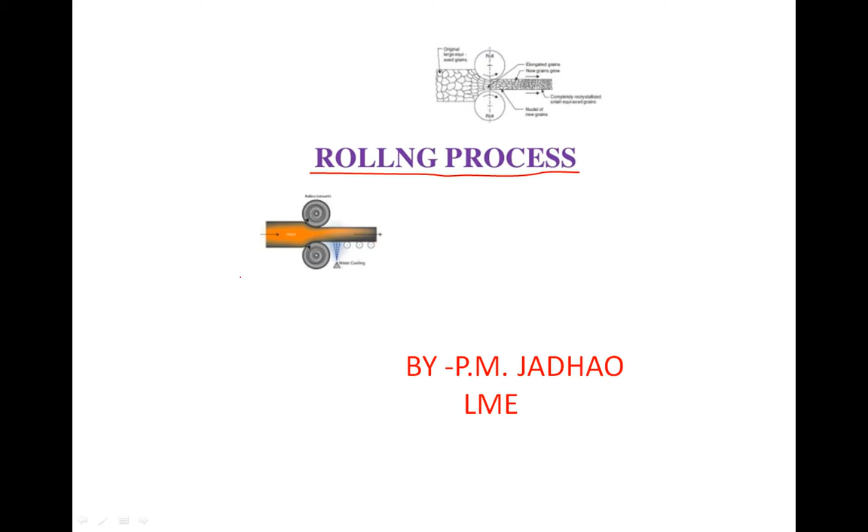So this rolling process, if you look at this diagram, there are two rollers. This is roller number 1 and this is roller number 2. R2 is roller number 2 and this is the workpiece or billet. You are calling it a billet or workpiece. This is the billet. This billet is fed in between these two rollers.

When it passes, the compressive force of the roller and the friction between this billet and this roller will plastically deform and reduce its cross-sectional area because of the compressive force and the friction between this roller and billet. So this is the working principle of rolling process.

So what is the working principle of rolling process? When you are passing this billet in between these two rollers, it gets compressed, and because of the compressive force and friction between this billet and roller, you can convert this billet into various shapes. That is the basic principle of rolling process.

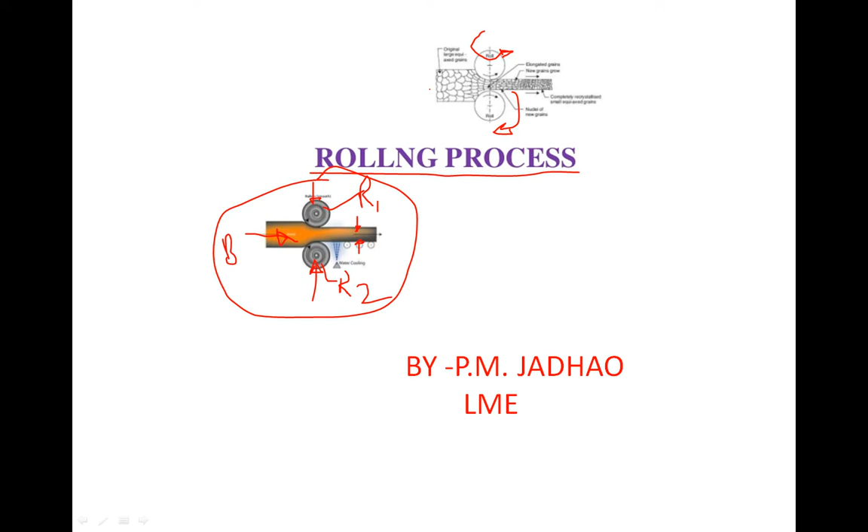In this, these two rollers will rotate in opposite directions. If you look, this is rotating in the clockwise direction, so the above roller will rotate in the anti-clockwise direction. Then this billet will pass through, and there is a reduction in cross-sectional area, or reduction in width of this billet.

If you see this, then this is the reduction. So this is L2 and suppose the distance is L1. So if the width at the beginning is L1, at the last you are getting L2, and there is a large reduction in the width of the billet or workpiece. So that is the rolling process.

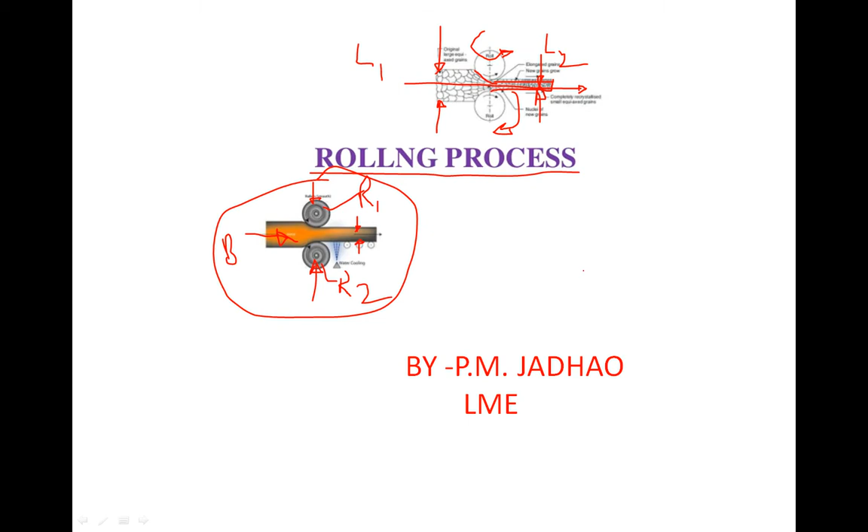So this is the basic definition of rolling, and rolling is widely used as a forming process because there is no wastage of material. You are not wasting any material. That's why it is a forming process which provides high production and close control of the final product.

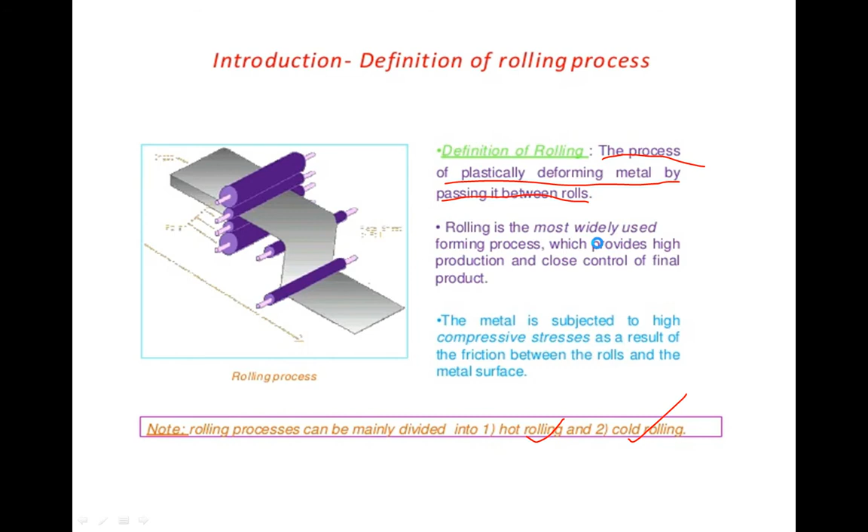The metal is subjected to high compressive forces as a result of the friction between the rolls and the workpiece surface. So there are basically two types of rolling. One is hot rolling, another is cold rolling. These are the basic terms used in rolling process: bloom, billet, slab, plate, sheet, strips.

So what do you mean by bloom? Bloom is the product of the first breakdown of the ingot. Its cross-sectional area is greater than 230 square centimeters. That is called a bloom.

Then this billet is the product obtained from the further reduction of this bloom into billet. And this billet is further rolled, and if the area is greater than 100 centimeters square with a width greater than or equal to 2 multiplied by thickness, then that is called a slab. This is the slab. Then if we carry out further rolling, the slab is converted into plate, sheet and strips like that.

So what do you mean by plate? Plate is the product with a thickness greater than 6 millimeter. Then that is called a plate. If the thickness is less than 6 millimeter and width is greater than 600 millimeter, then that is called a sheet. And thickness less than 6 millimeter and width less than 600 millimeter, that is called a strip. So these are the basic terminology used in rolling process.

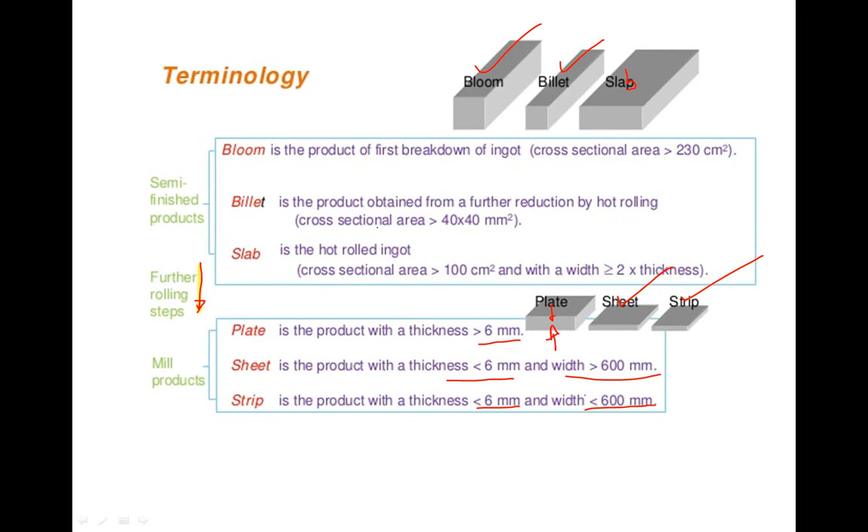Now there are two rolling processes. One is hot rolling process. Another is cold rolling process. When you are carrying out above the recrystallization temperature, then that is called a hot rolling process. If the process is carried out below the recrystallization temperature, then that is called a cold rolling process.

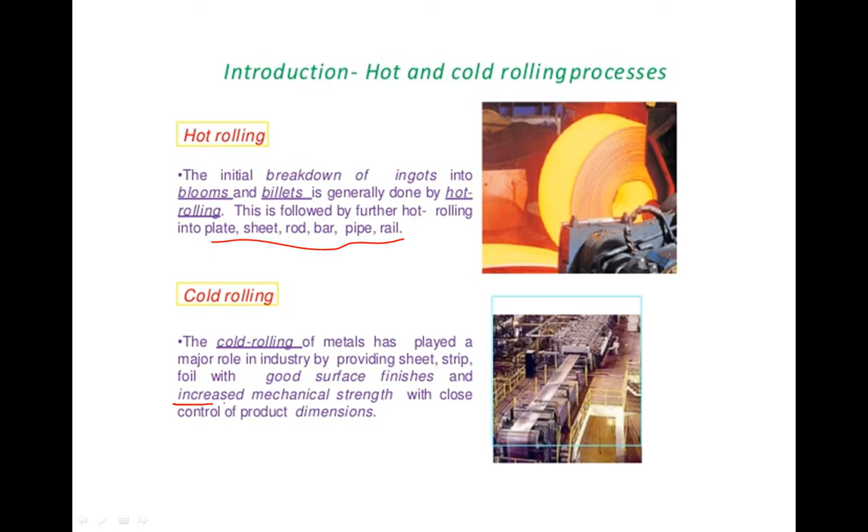So the initial breakdown of ingots into blooms and billets is generally done by hot rolling. This is followed by further rolling, that is, these billets are converted into plates, sheet, rod, bar, pipe and rails. Cold rolling of metal has played a major role in industry by providing sheet, strips, foil with good surface finishes and increased mechanical strength with close control of product dimensions.

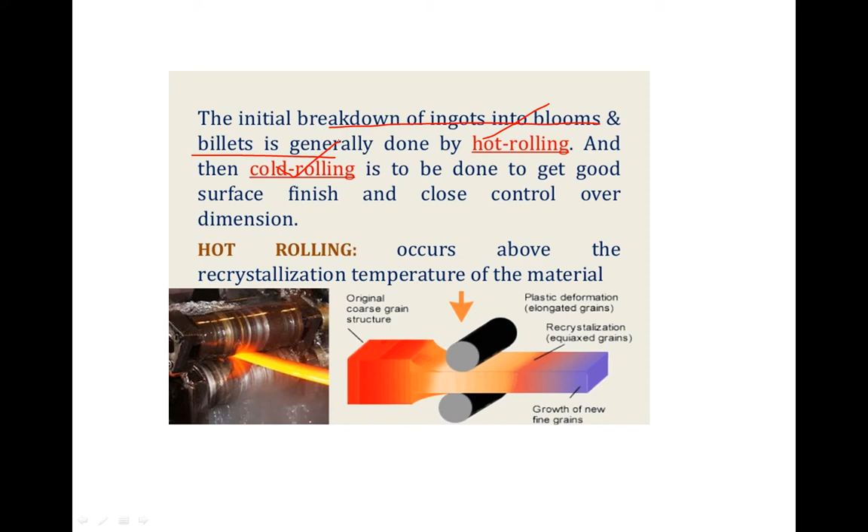So for breakdown of ingots into blooms and billets, the hot rolling process is used. When you require close control over dimension and good surface finish, then the cold rolling process is used. So hot rolling occurs above the recrystallization temperature.

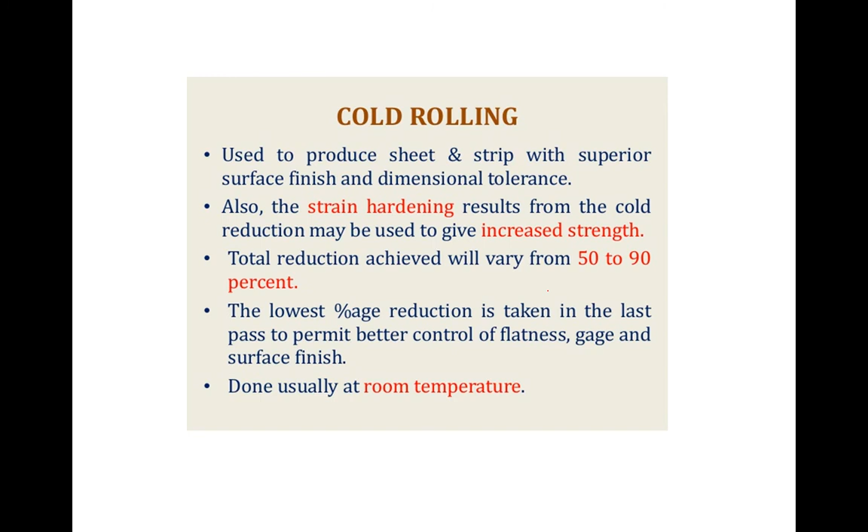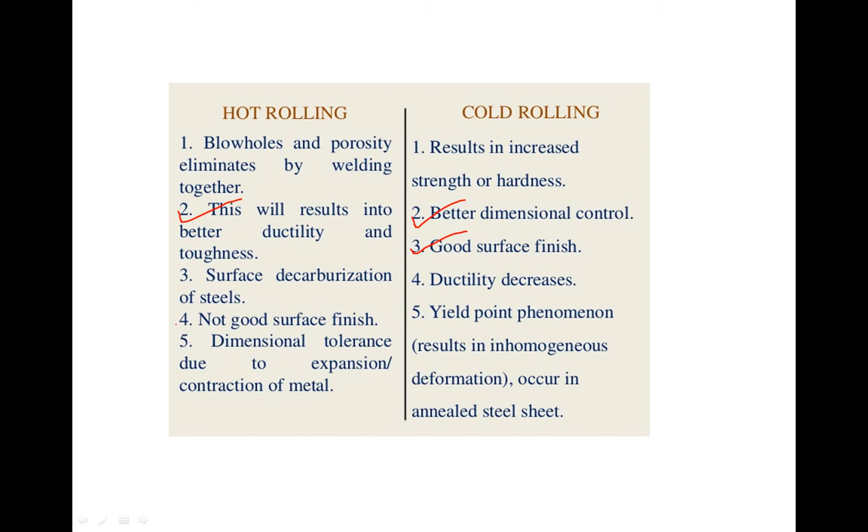So the difference between hot rolling and cold rolling. Blowholes and porosity are eliminated in hot rolling, but in cold rolling, there is porosity and blowholes. In hot rolling, better ductility and toughness you can obtain. In cold rolling, better dimensional control is there, and you obtain a good surface finish, but in hot rolling, you are not able to obtain a good surface finish. Some surface decarburization, rusting of the surface will be there.

In cold rolling, ductility decreases, not improved. So these are the various differences. In hot rolling, less force is required. In cold rolling, more force is required. So more powerful equipment is required in cold rolling, and less powerful equipment in hot rolling, similar to hot working of metals and cold working of metals.

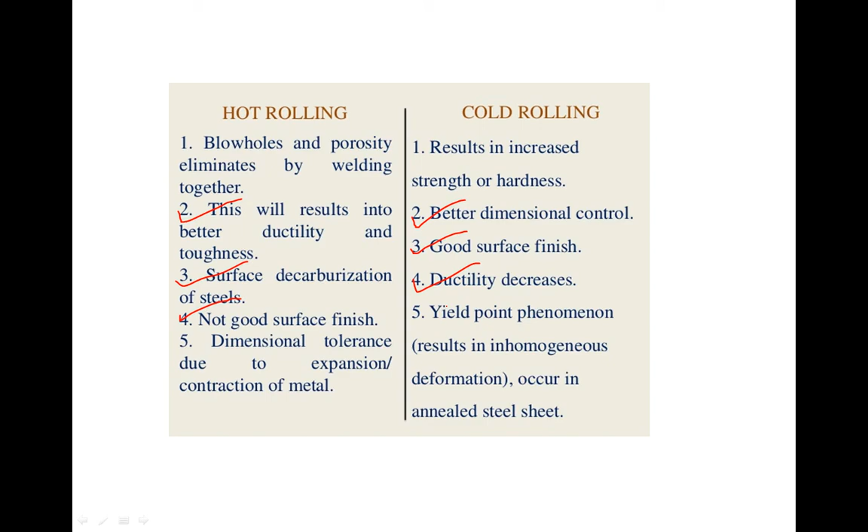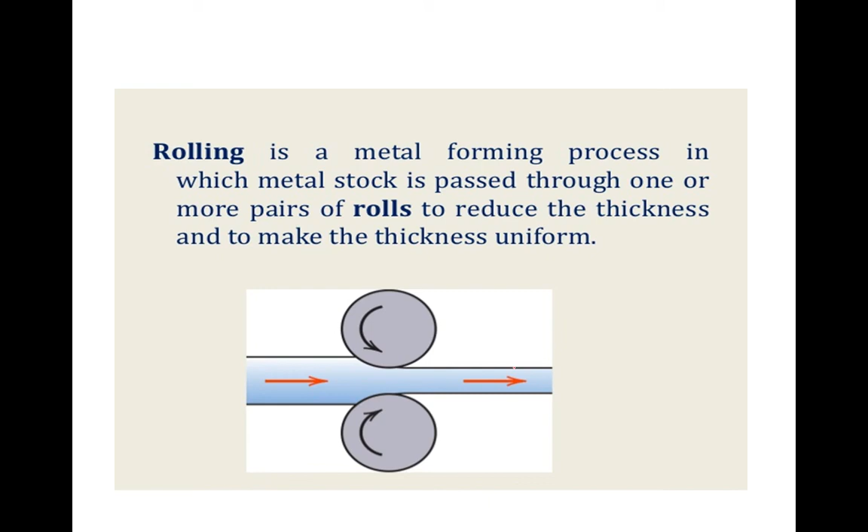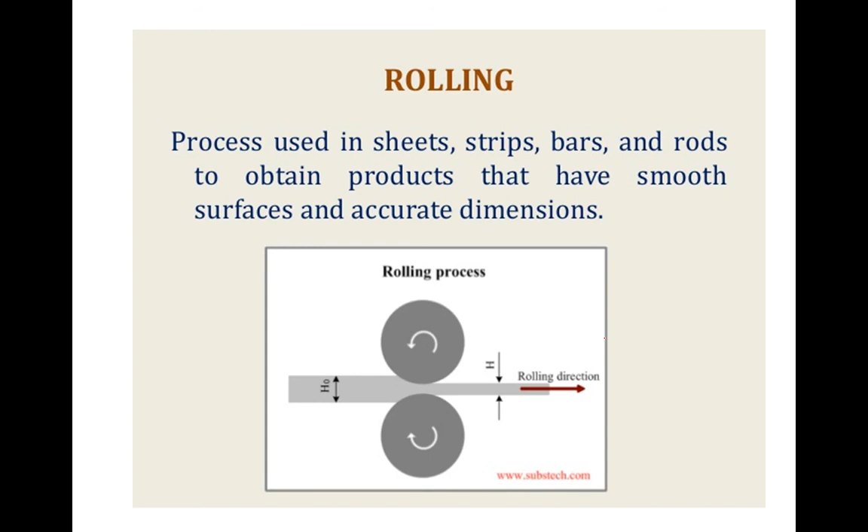So this is the basic block diagram of rolling. It is a metal forming process in which metal stock is passed through one or more pairs of rolls to reduce the thickness and to make the thickness uniform. So in this case, the thickness of this bar is reduced while passing through these two rolls. These two rolls are rotating in opposite directions. This process is used to produce sheets, strips, bars and rods. It may be hot or cold rolling process.

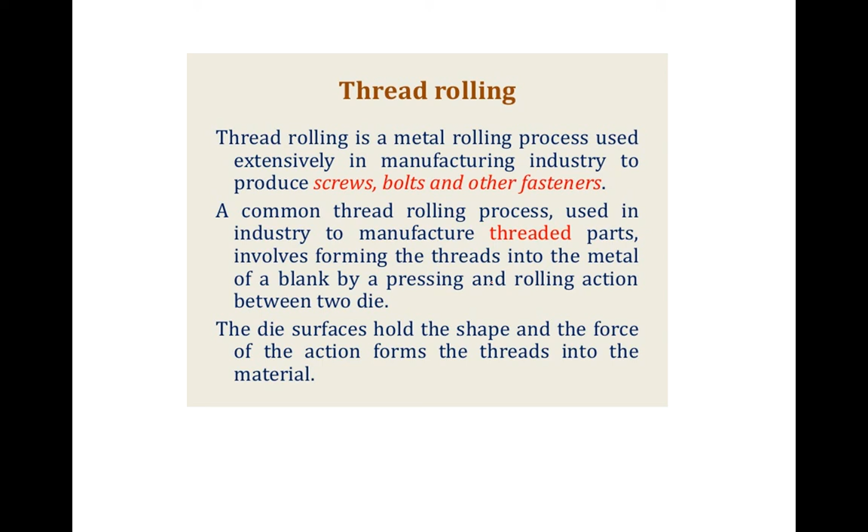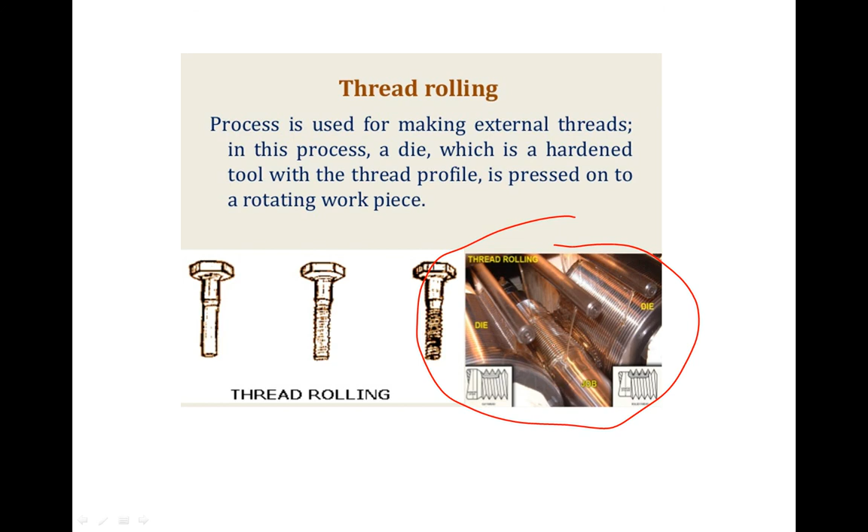So this is all about the rolling process. In the coming session, we are going to discuss the various types of rolling mills.